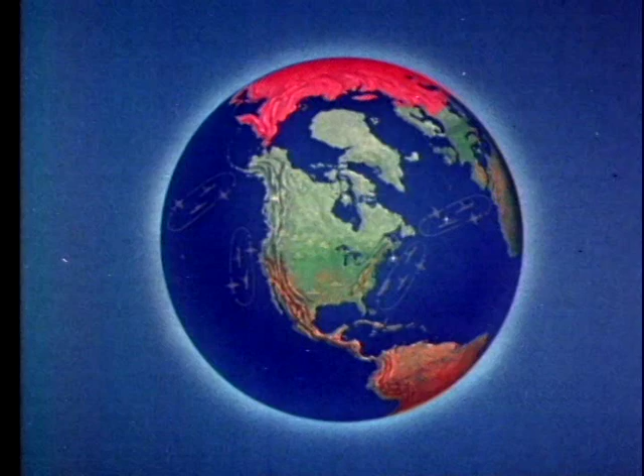Sprawled across North America, from the polar ice cap to the Mexican border, is a giant with 1,000 eyes. Day and night, fair weather or foul, he guards his homeland. This giant is the air defense system of North America, a vast and intricate maze of radar networks. Through the electronic eyes of this giant, we are able to see the enemy before the enemy sees us.

These radars never sleep. Round the clock, they stand ready to do their part in minimizing the penetration of enemy bombers. And round the clock, their quietly pulsing hearts, the magnetrons and the klystrons, help generate the power for peace that keeps America strong.

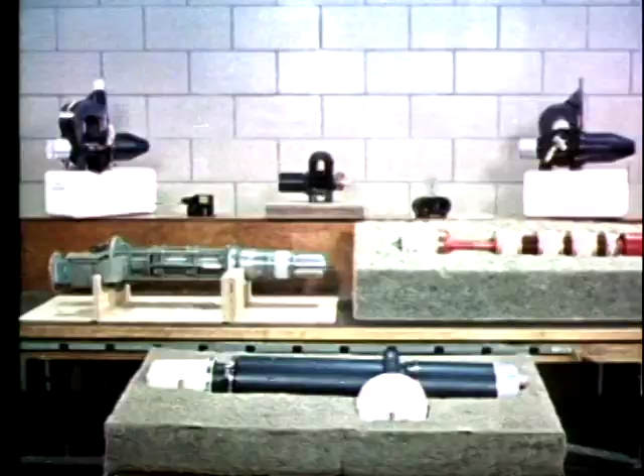These microwave power tubes, the magnetron to generate the radar signal, the klystron amplifier for radio communication, and radar are the subject of our story. It is a story about these vital tubes, but even more about you, the men who work with them. When you have a well-trained maintenance man with a well-adjusted radar at a well-chosen site, then you've really got a winning team.

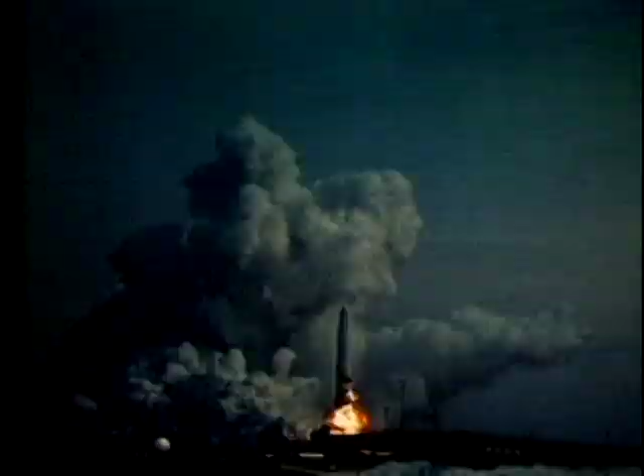They keep the airborne radars operating and ready for crucial missions. In missiles that depend upon radar for guidance. In bombers that depend upon radar for bombing and navigation. In interceptors that depend upon radar for fire control. And in reconnaissance and search aircraft that depend upon radar to extend their vision.

Years of scientific research and millions of dollars worth of equipment have gone into this aircraft. But only if the maintenance men keep the radar functioning can it complete its mission. When something goes wrong, they've got to make a quick decision, whether to attempt repairs in flight or abort the mission.

There's trouble here, that's for sure. But what kind of trouble? First, they check the radar scope presentation. Sometimes this gives a clue. But the most reliable analysis comes from the test equipment on the monitor panel.

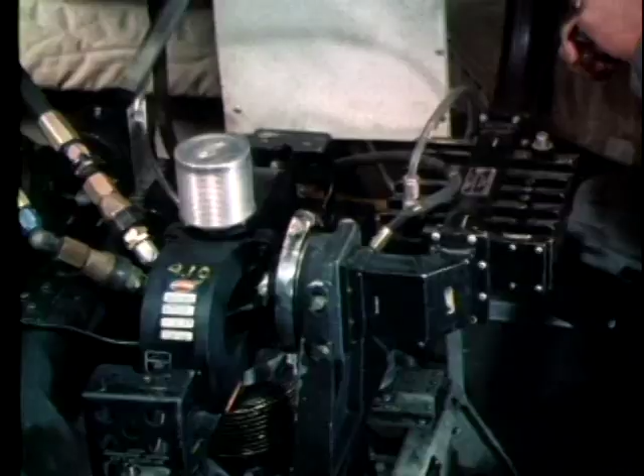Yes, the pressure's low. This is a danger signal. If this arcing continues, the magnetron output window may be damaged, the tube's vacuum lost, and the magnetron destroyed. Waveguide joints should be tested to make sure they're airtight.

This man is making a liquid soap test. See where the bubbles are forming? He's found the trouble. But how serious is it?

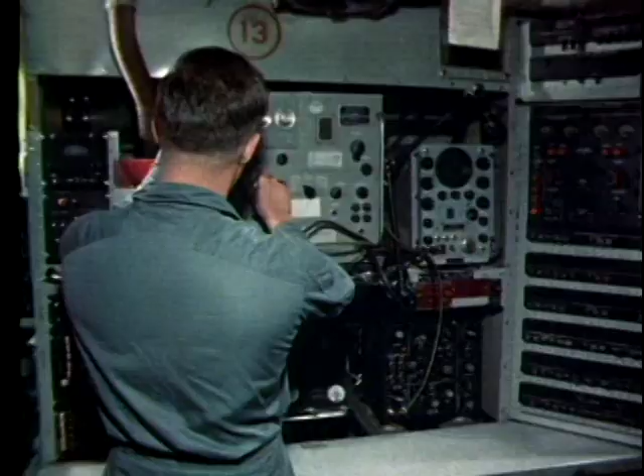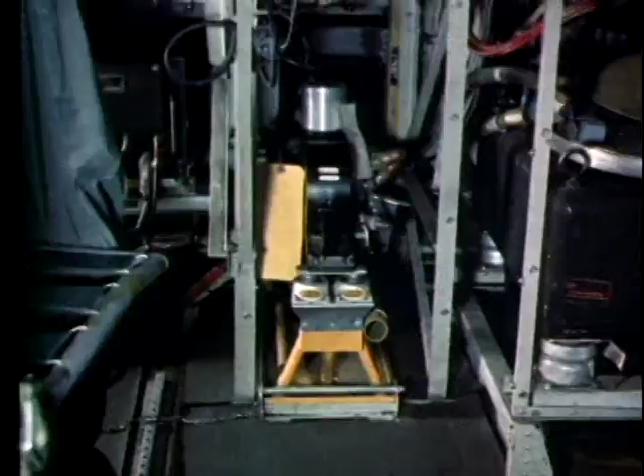He checks the spectrum analyzer again. It looks bad. See how the pulse has changed? Finally, the main pulse deteriorates completely. Bad news. The magnetron is seriously damaged. It's beyond repair. This means shut down the equipment and get ready to install the spare.

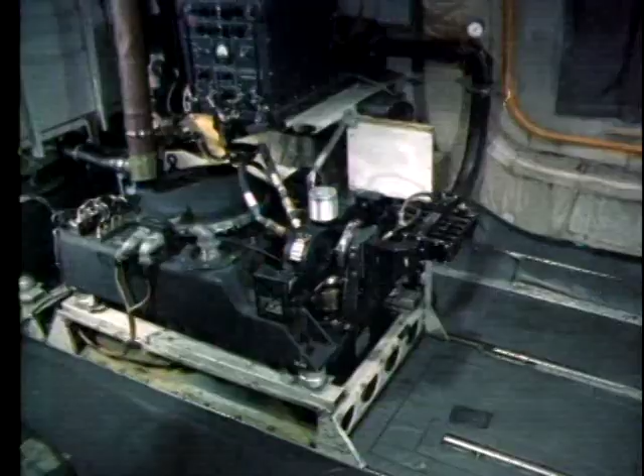While they're working, let's take a look inside the magnetron. Animation shows what caused the malfunction. We'll turn time back a few hours and show the Maggie functioning normally.

As the pulse from the modulator is applied, the Maggie produces radio frequency oscillations to form the radar pulse. This energy is then coupled into the waveguide and directed to the antenna for transmission.

Energy is reflected back along the waveguide toward the magnetron. Normally, when the antenna system is in good shape, the reflected wave won't be strong enough to cause arcing at critical points.

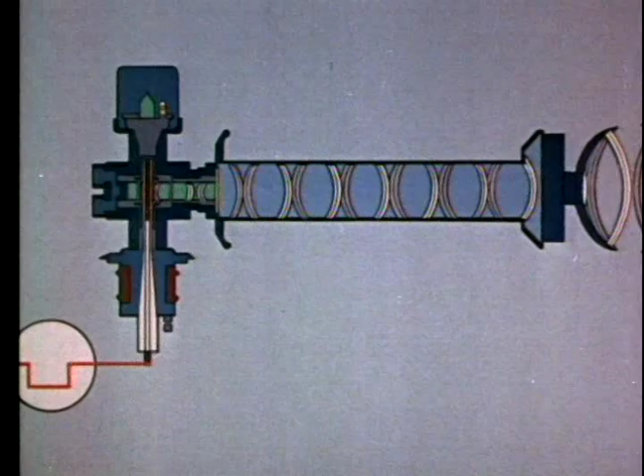But as conditions such as loss of waveguide pressure develop, the antenna characteristics change and the reflected wave becomes greater. Then arcing may take place at the point where the radar wave leaves the magnetron, causing the magnetron output window to crack or puncture.

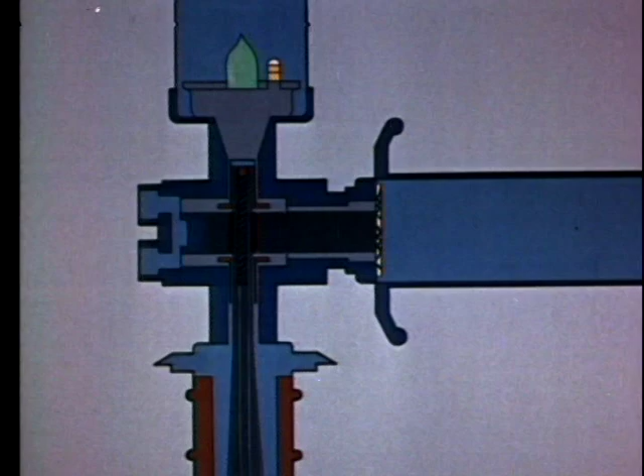As the vacuum is lost, the heater oxidizes and burns out. The cathode cools. Air seeps into the interaction space, and arcing occurs with each pulse.

After the magnetron has been unbolted, the filament and cathode connections are uncoupled. A large magnetron like this one requires 2 men to handle it safely.

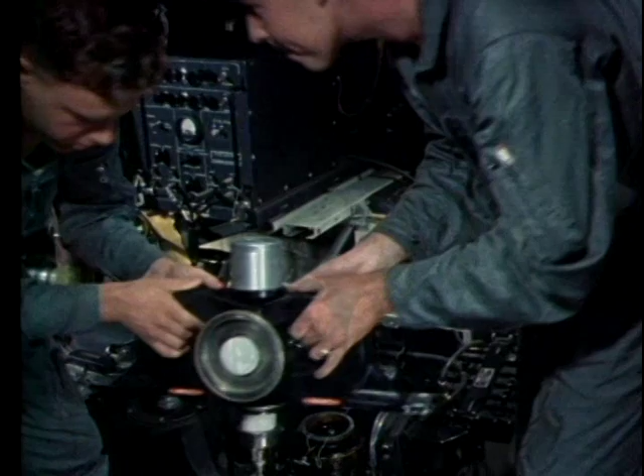Before a Maggie is replaced, all connections, mating flanges, and sealing surfaces should be inspected. Insulating oil should be examined for foreign matter. Damaged or worn gaskets should be replaced.

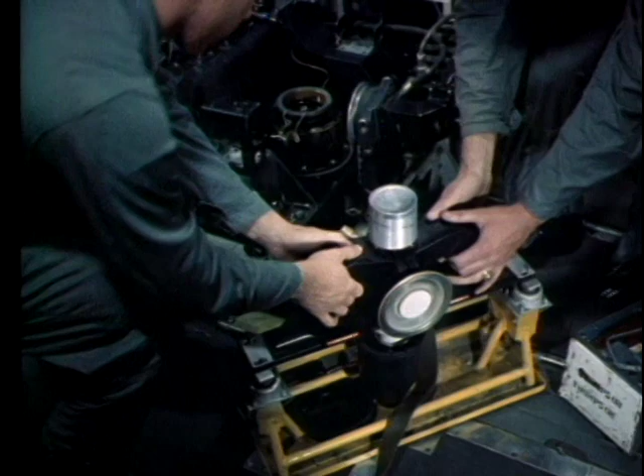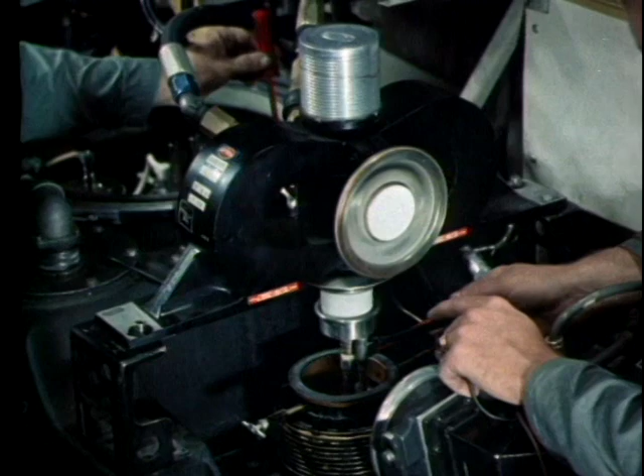Heater's supply voltage should be established at the value marked on the tube. Later, when the plane returns to base, the heater voltage should be double-checked with an accurate instrument.

Now that the spare magnetron has been installed, further tests are necessary. The technician must make sure he has the required pressure and that there are no air leaks. Instructions concerning the care of pressurized antenna systems will be found in the appropriate tech order handbook.

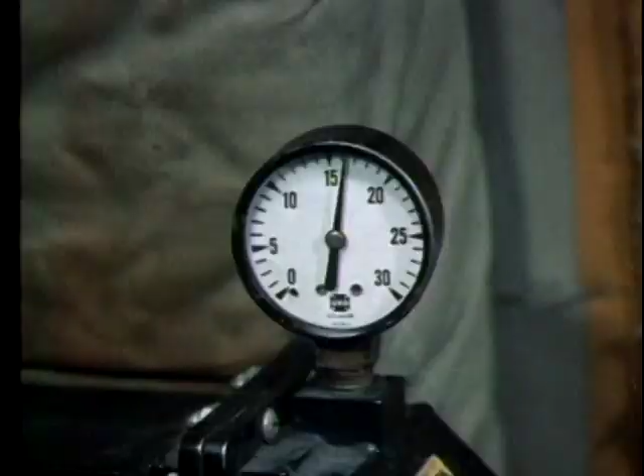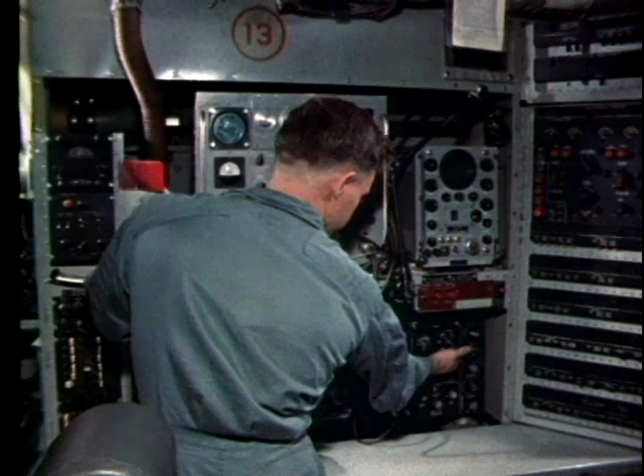The liquid soap method is a simple way to check for pressure leaks and may be used where more accurate means of testing are not available. Test equipment is used to analyze the performance of a newly installed tube.

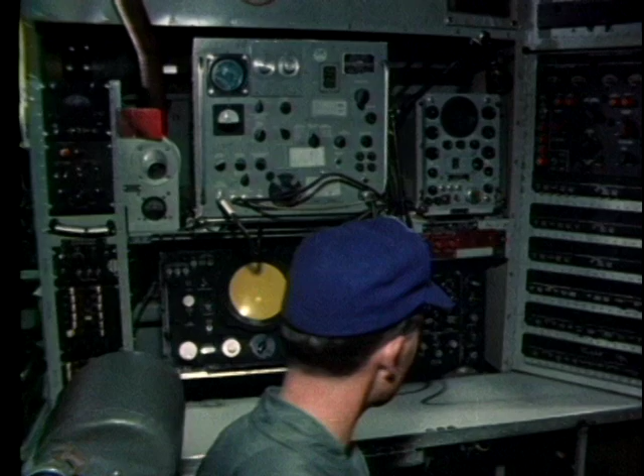Not only that, it means that these technicians know their jobs. They were able to analyze the trouble correctly and replace the magnetron in flight. Because they knew what to do, this aircraft was able to complete its mission.

Let's take a closer look at these microwave power tubes. Magnetrons costing from $100 to $10,000.

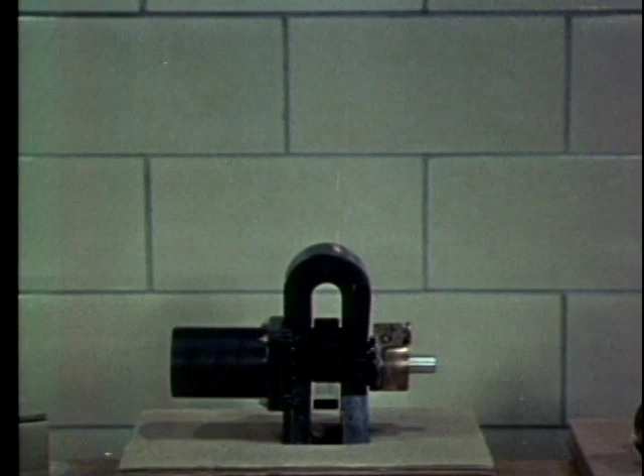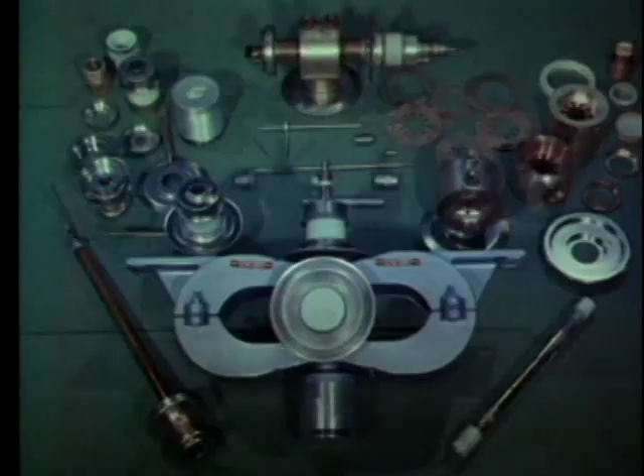Klystrons costing from $1,500 to $25,000. Why so expensive? Let's see what's inside them. Look at this—parts so critical they must be inspected through a microscope.

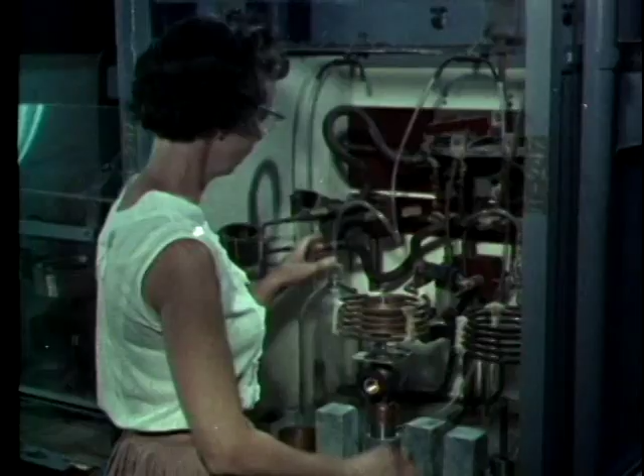Tolerances accurate to 4/1000ths of an inch. To build them to such close tolerances requires involved manufacturing processes. Specialized parts must be carefully assembled.

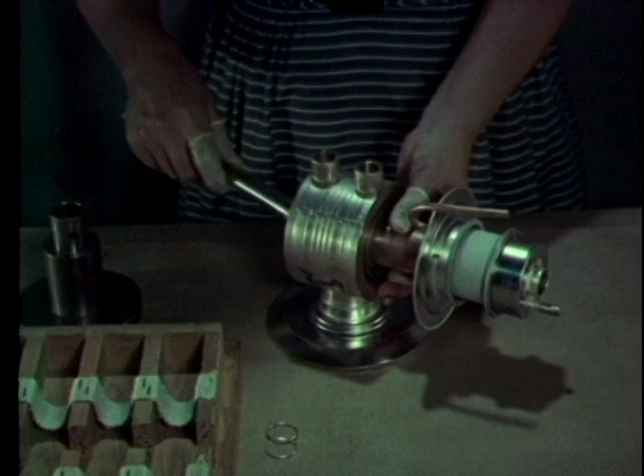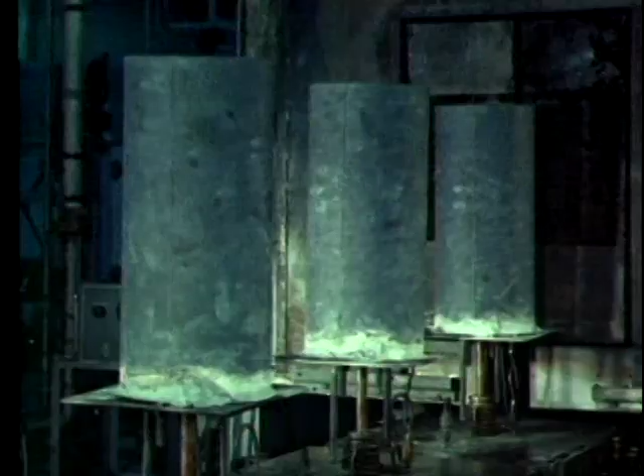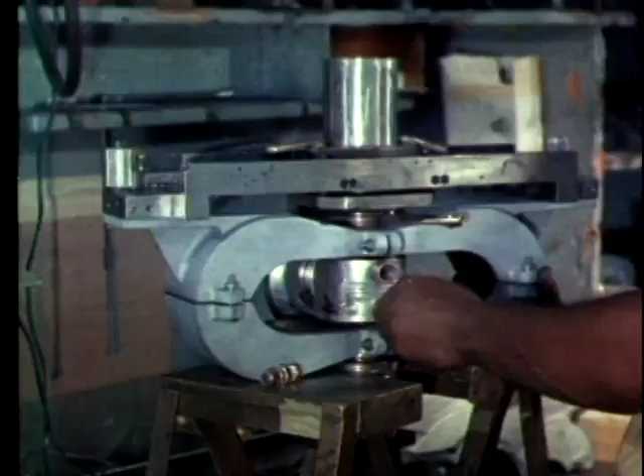The completed assembly is heat treated to bake out gas molecules, so that they may be removed by an evacuation machine. External mechanical parts, such as couplings and magnets, are installed. The final step is rigid testing of electrical performance to make sure it meets the high standards required.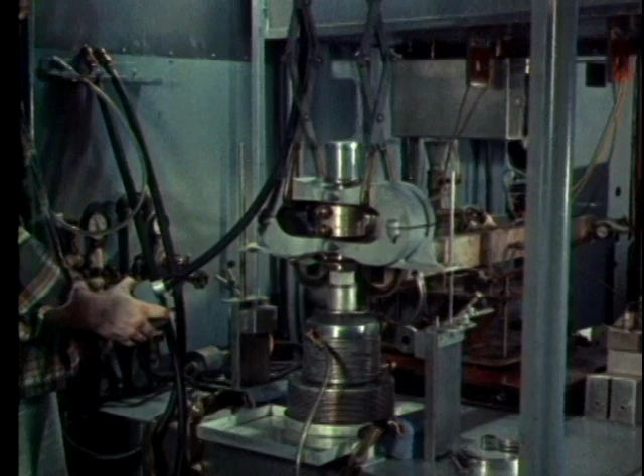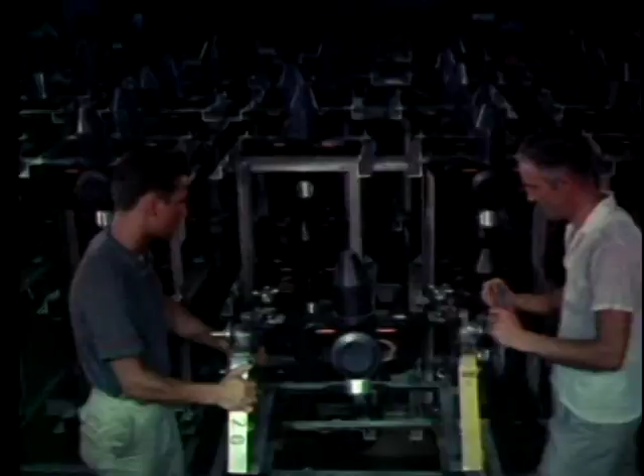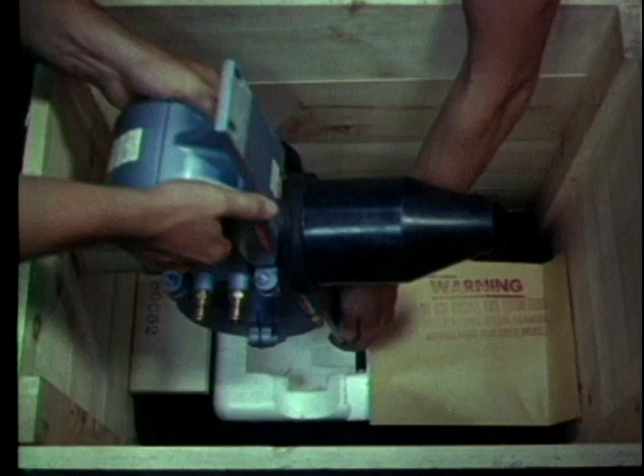Pressure tests ensure leak-proof connections throughout. Now the tubes can be put into storage. Even here, should tiny defects develop while on the shelf, continuous sample testing will reveal them. Before shipment, the delicate tubes are carefully packaged.

The quality designed in during research, built in during manufacture, maintained by rigid testing and careful storage, will reach the user intact.

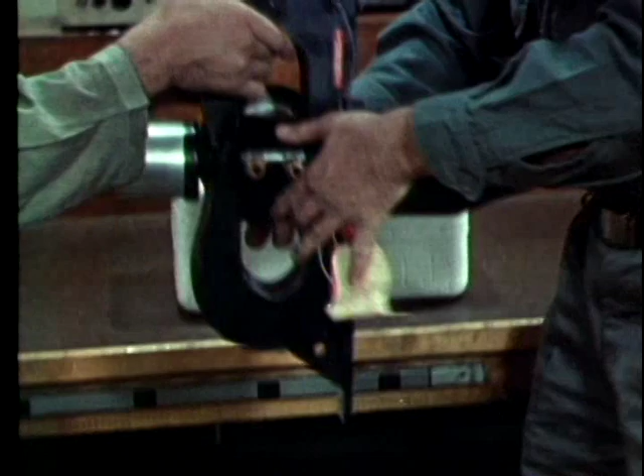Here are a few basic rules on proper handling. Always use two men to lift a heavy tube. A portion of a carton makes a good tube stand, protecting delicate parts from damage. But a wooden rack is better and lasts longer.

Save all the cartons and packaging materials. Use them to return defective tubes to the factory.

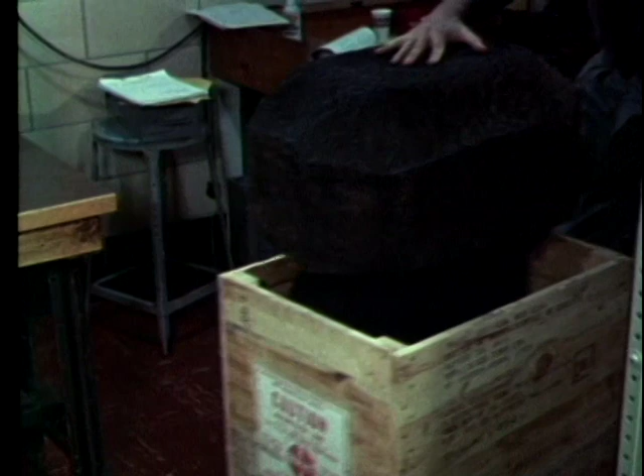Magnetrons should be separated at least 12 inches, then their magnetic fields won't interact. Don't store them on steel shelves, or they may be degaussed. Don't use steel tools.

Use non-magnetic tools. Following these simple rules will save time and trouble, prevent damage, and save the Air Force many thousands of dollars each year.

On most of the smaller high-performance aircraft like this one, it is not possible to do in-flight radar maintenance. Therefore, most of the work must be done in the electronics maintenance shop.

This aircraft has just aborted an intercept training mission. The reason: radar malfunction. Had this mission been the real thing, an enemy bomber could have broken through our defenses. The maintenance man's job is to find out why the radar malfunctioned and correct the trouble.

You'll see that although these radars come in smaller packages than those on larger aircraft, they are just as big a maintenance problem. The maintenance supervisor is in charge of this work.

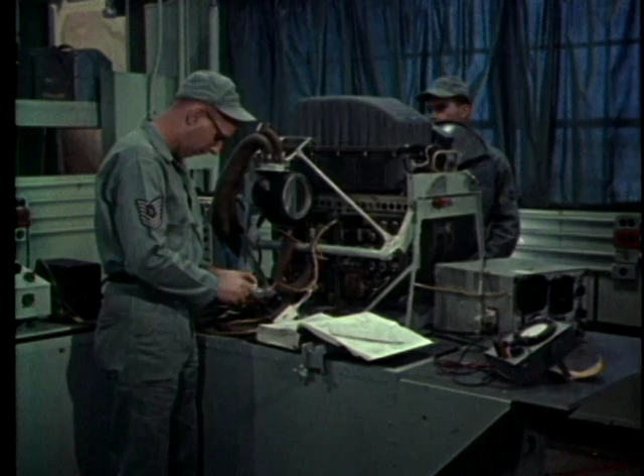An important point to remember is that the transmitter malfunction may be caused by parts other than the magnetron. Wherever possible, other circuit components should be checked before power is applied.

A simple resistance check will often reveal a short circuit. That's what the trouble is here. The airman will carry on from here and trace the short circuit.

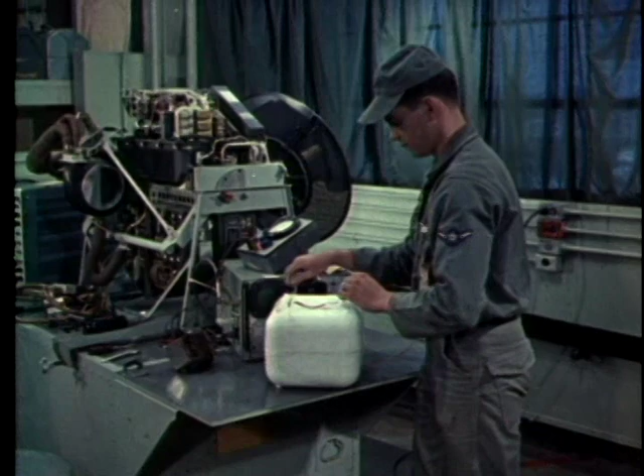So far, so good. He's found a shorted filament transformer and replaced it with a new one. But what's this? He's decided to change the magnetron, too.

The supervisor disagrees. Tube swapping is not a good idea. The old magnetron should be thoroughly tested before any decision is made.

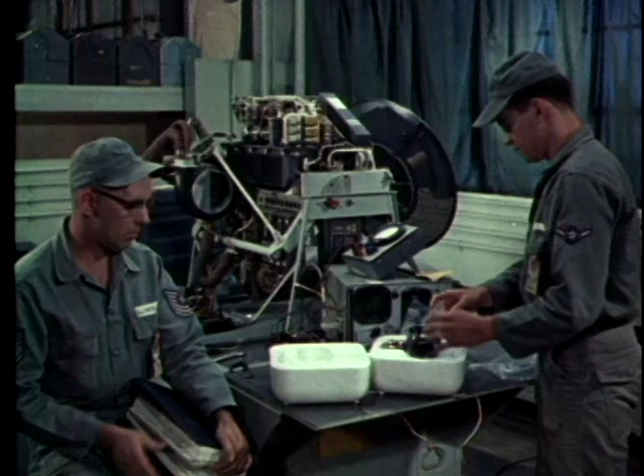Testing showed that the old magnetron should be replaced. This has been done. Now let's see how the new Maggie behaves.

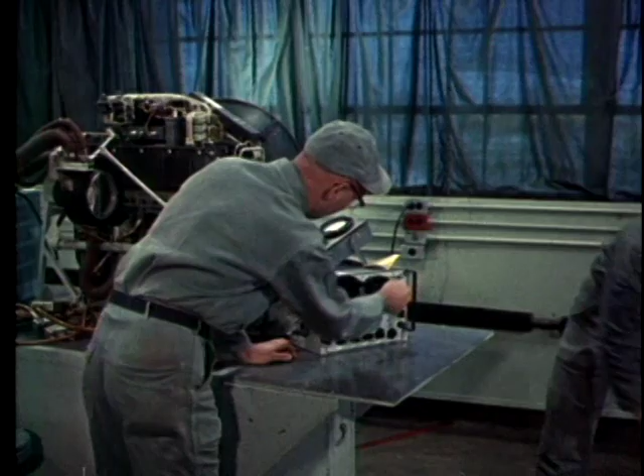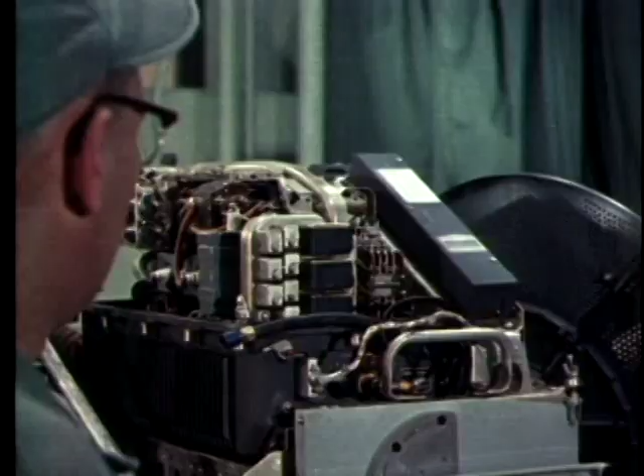This is confusing. The spectrum analyzer shows arcing. Let's look inside the tube and see what's causing it.

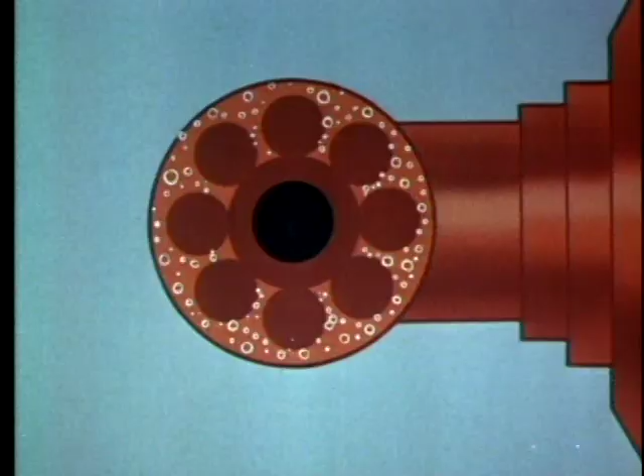Magnetrons are made of porous metals, which usually trap a small amount of residual gas. During storage, gas molecules migrate into the interaction space surrounding the cathode. When the tube is installed and power applied, it will operate normally if the gas content is low.

But if gas content is high, arcing will occur with each modulator pulse. This arcing might be mild or severe. Frequently, tubes with residual gas can be restored to normal operation by a suitable break-in or seasoning period.

During break-in, the gas molecules are driven back into the walls of the tube, and normal operation resumes. If the equipment is operated frequently, normal operation should continue throughout the life of the tube.

Occasional individual arcs may also be noted in a normal tube which does not contain gas, but this behavior is due to transient conditions and should be considered as normal.

All new tubes which display arcing when they are first installed should be thoroughly tested and analyzed before being discarded. This will save the government both time and money.

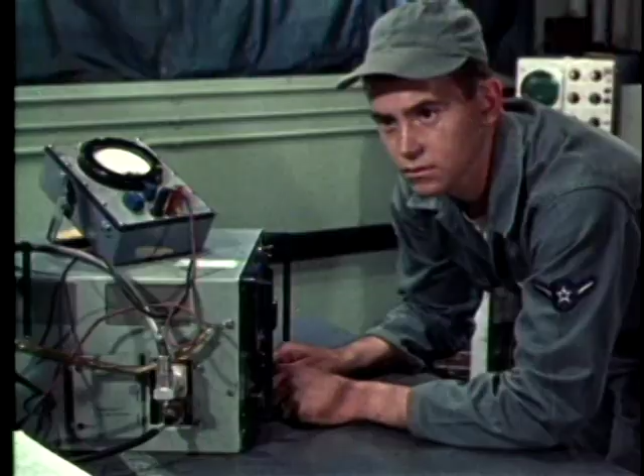The repairs are finished. Now comes the break-in procedure. Proper break-in can clear up various degrees of internal arcing. But watch the spectrum analyzer carefully. If frequent arcs occur, switch to standby immediately.

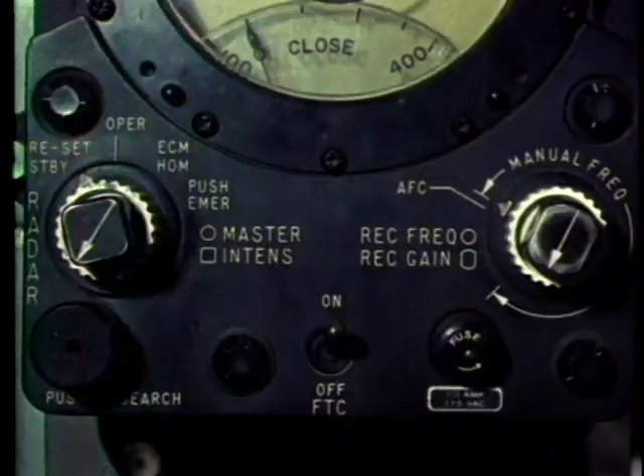Small magnetrons may be damaged if severe arcing is allowed to continue more than 2 seconds. Now the range selector switch must be changed to short pulse before the magnetron is operated.

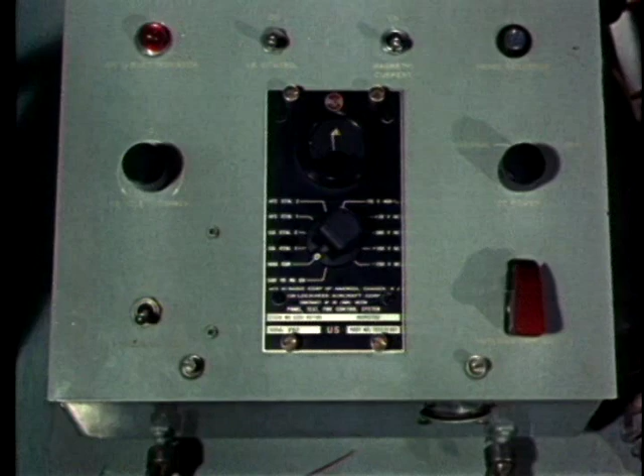If only sporadic arcing occurs, operation may be continued. But a series of arcs may cause the overload to pop. In this case, reset the switch and continue the break-in.

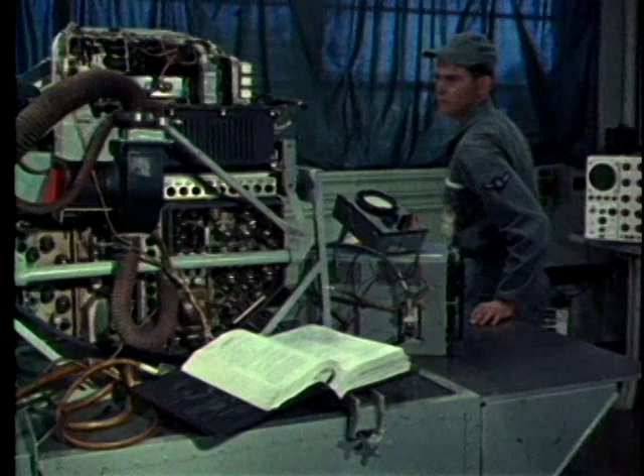To avoid possible damage during the break-in, the technician should keep a close watch on modulator tubes and other components of the RT unit. The time required for break-in will vary with the tube, conditions, and methods used, but normally break-in can be accomplished in 20 to 60 minutes. When break-in is complete, and only infrequent arcs or misfirings occur, operation may be regarded as normal, and the equipment made ready for service.

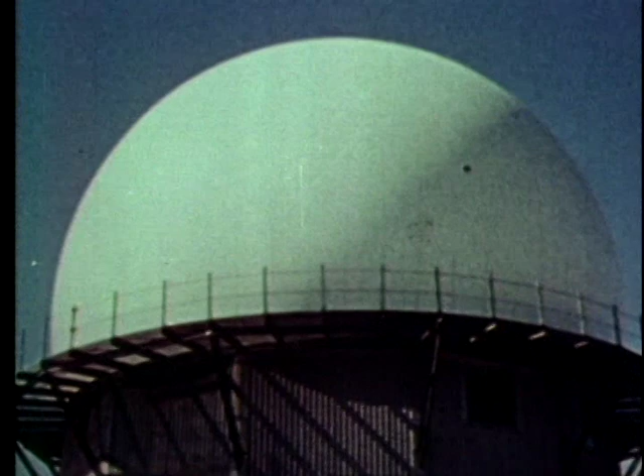In addition to the airborne radars, there are a great many ground radar sites scattered about the continental United States and Canada. They are found in almost every type of American scene: in the dusty expanse of the plains, in the north woods, the heat and humidity of the deep south, in the rolling farmlands of the Midwest, and the saltwater scenes of our coastal areas.

Each of these has its own problems of maintaining and efficiently operating its microwave power tubes on a round-the-clock basis. Some of this equipment is completely automatic, but experienced technicians are always nearby, just in case. At the many radar sites where there is no standby equipment, the maintenance man is an even more vital unit in the organization.

In the operations room, observers keep constant watch on the radar scopes. Here's trouble developing.

When equipment starts to malfunction, quick repair is a must. These men are so used to the sound of the equipment, they can tell by listening whether the magnetron is operating or not. It's not.

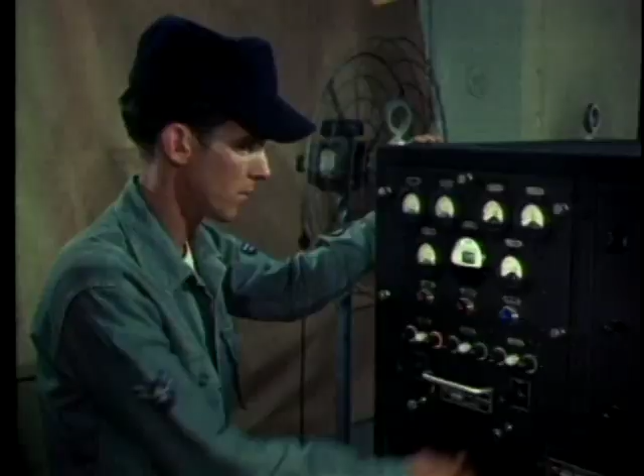Something caused this radar to quit. What was it? Sometimes the meters will tell the story. The filament current has dropped to 0, and the filament voltage is too high, indicating that a portion of the heater element is open. A quick, careful analysis has to be made.

Here is where maintenance skill and training pay off. The question is, has the magnetron become inoperative because of heater failure? Or is there another cause?

Yes, here's something. The insulator is pitted. High-powered magnetrons like this one have insulator bushings immersed in oil. It might be that the insulating oil has broken down. Better check this.

Here's the answer. Contaminated oil. The oil failed to insulate. Oil can break down after long exposure to heat and high voltage. Oil may also be contaminated by dust, moisture, metal particles, or air bubbles.

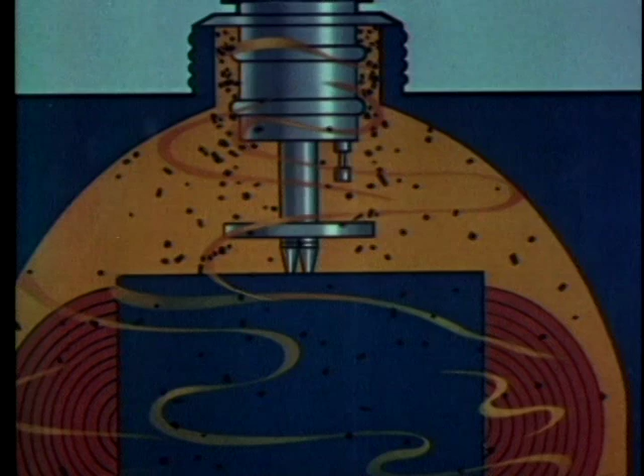Here is how contamination breaks down oil. As contamination accumulates in the oil, current paths are created between high voltage terminals and ground. As the condition becomes worse, due to increase of contamination and change in oil structure, a definite high voltage path for corona discharge is created in the oil.

The corona discharge begins to erode the surfaces of the insulator. As the insulators are penetrated, the vacuum in the tube is destroyed, and the tube is damaged beyond recovery.

The maintenance men have completed oil replacement using all precautions to prevent contamination. They have checked the grade of oil against tech orders and factory instructions.

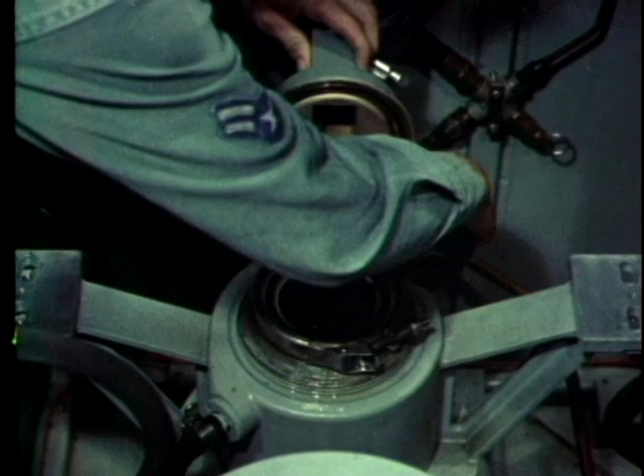But before installing the new Maggie, all mating surfaces and flanges must be inspected and cleaned or replaced as required. It is also necessary to check waveguide parts, replace gaskets, coolant hoses, oil fittings, and so forth.

Be sure all electrical connections are secure. Careful, watch out that terminal doesn't hit the cabinet. That could ruin the tube.

Make certain that all clamps, bolts, coolant hoses, and so forth are secure before operating the tube. All set? Okay, hit the power button. Uh-oh, that one didn't last long.

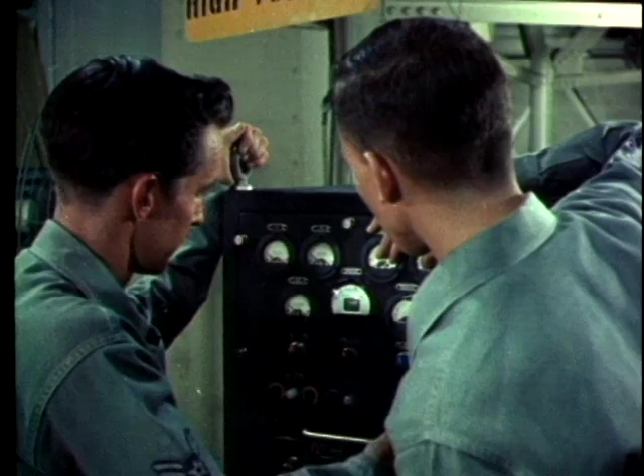There are many reasons why new tubes may fail to function properly. One of the primary causes of tube failure is damage sustained during transportation and handling. This damage may occur during shipping or in the depot, or during Air Force distribution to the base.

Here is what actually happened to that new tube which failed to operate. Nobody saw it happen. Nobody's going to tell. And nobody's going to get the slightest use out of that magnetron.

But these men don't know this Maggie fell off a truck. They just know it won't work. Could it be something wrong with the rest of the equipment? A short circuit? A bad connection? Or should they pull out this Maggie and install another?

They've installed another new Maggie. They've also followed correct procedure, allowing the heater to warm up 5 minutes before applying power to the anode. Ah, it works.

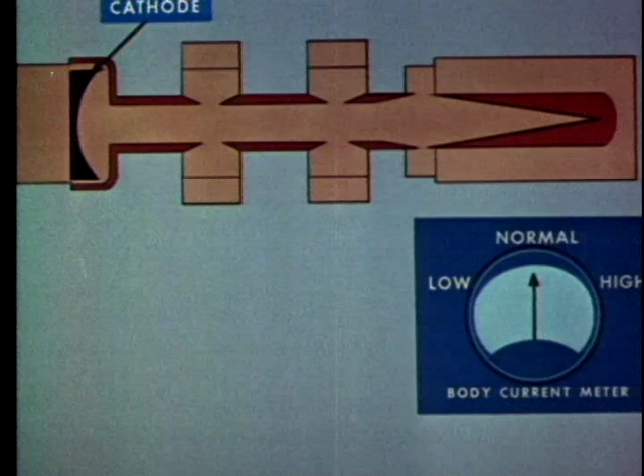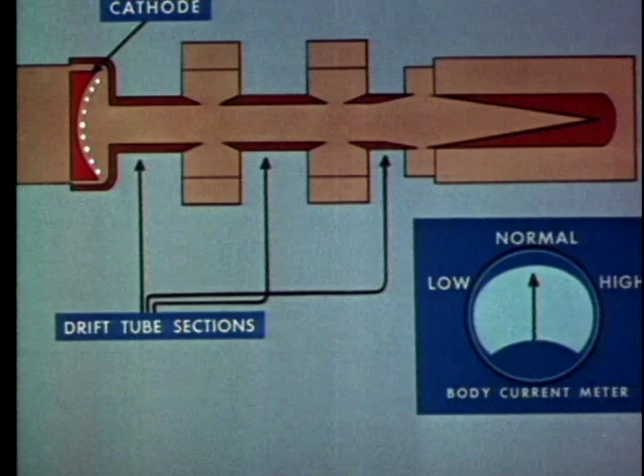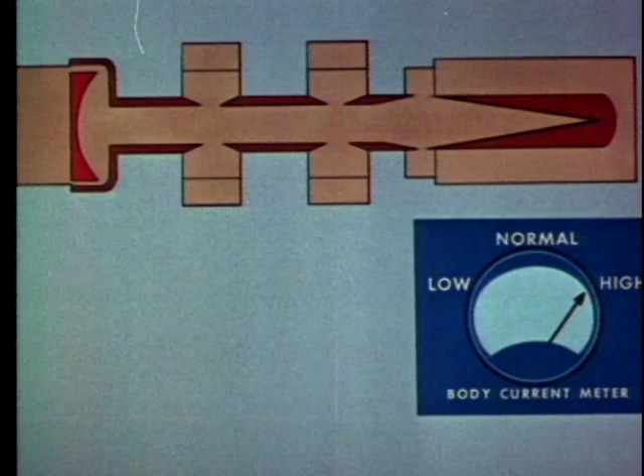Let's look inside a typical two-cavity power Klystron and see how it operates. The beam current is emitted by a heated cathode and passes through the drift tube sections. Since electrons in the beam have like charges, they repel each other and tend to diverge, to be absorbed by the walls of the drift tube sections. But electromagnetic coils placed along the tube align them into straight paths. However, misalignment of the focus coils can seriously damage the drift tube tips. Therefore, it is most important to adjust the magnetic coil currents properly during installation of the tube.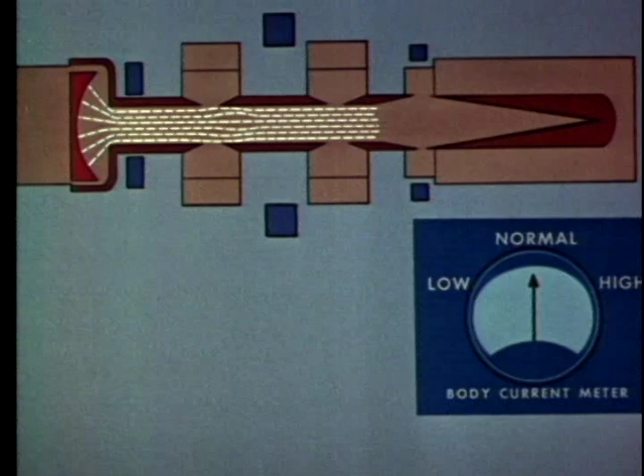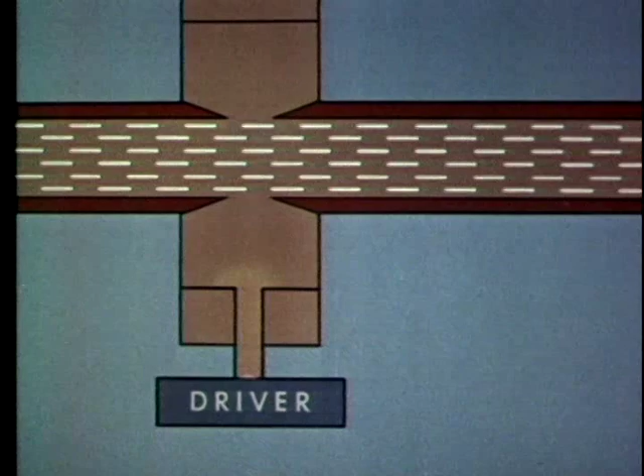When a steady direct current is flowing through the tube, an RF signal from the RF driver stage is introduced into the first cavity resonator. As the cavity is tuned to resonance, a strong RF field appears between the drift tube tips, which form a gap in the resonator. The electrical charges on these tips alternate at the driver frequency rate on opposite sides of the gap. At the same time, individual electrons in the beam are being accelerated or decelerated at the RF frequency rate.

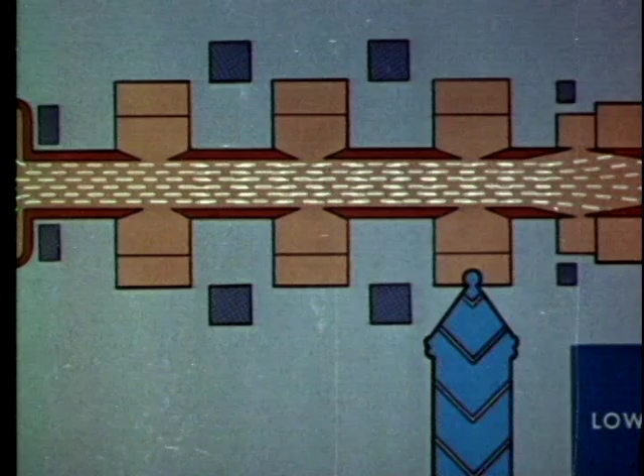This produces bunching of the electrons as they approach the gap in the second resonator. There they are decelerated and release energy. The resonator converts this energy to RF energy and amplifies it. Additional resonators are sometimes provided for greater amplification. From the last resonator, the amplified RF signal is coupled into the waveguide and transmitted to the antenna.

Various kinds of Klystrons are being phased into new Air Force applications, such as these tropospheric scatter communications transmitters. In this way, intelligence may be relayed from remote early warning sites to control centers many hundreds of miles away.

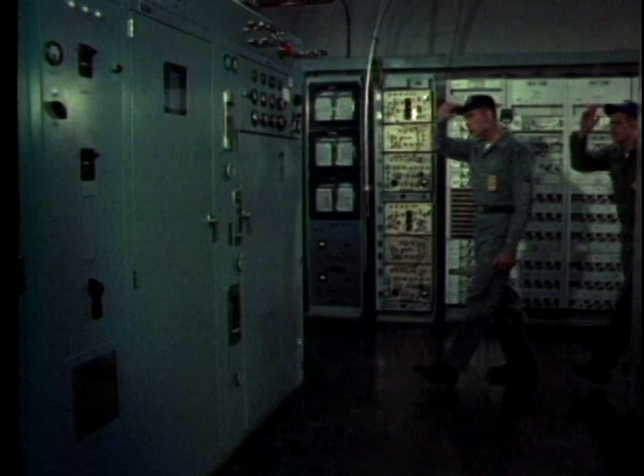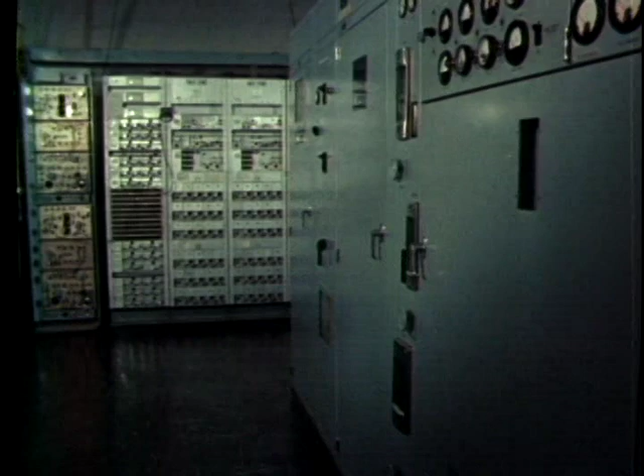This transmitter has dual equipment. One transmitter operates while the other is on standby in case of emergency. The equipment is automatic. Meters and instruments keep a constant check on its operation, and a warning light flashes in case of trouble.

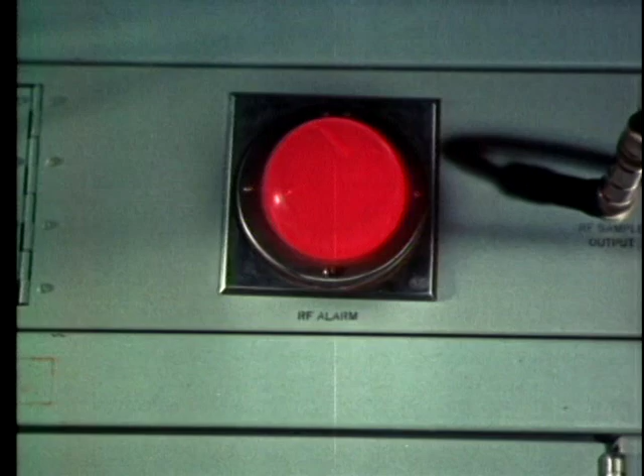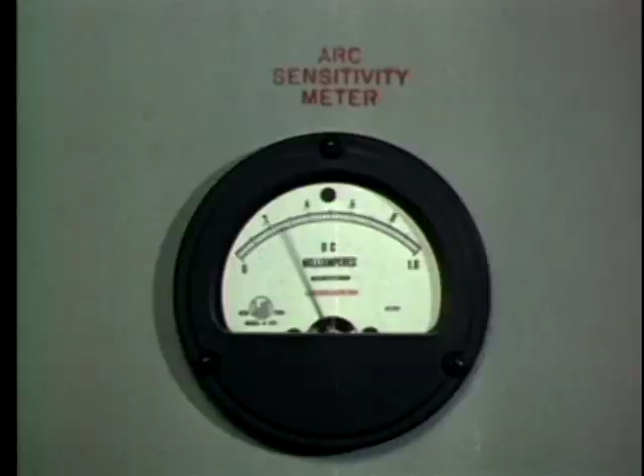And speaking of trouble, a glance at the meters tells them the trouble is in the transmitter output. The equipment is reoperated. Readjustment of the output cavity and coupler may correct the trouble, but the arcing continues. Since adjustment won't correct the trouble, all they can do is shut down the transmitter for repair and switch over to standby.

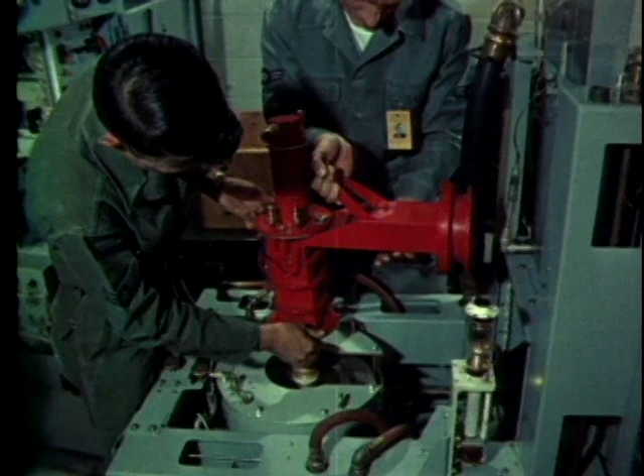The Klystron has been removed for inspection. It may have been damaged by the arcing. Yes, the output ceramic is badly damaged.

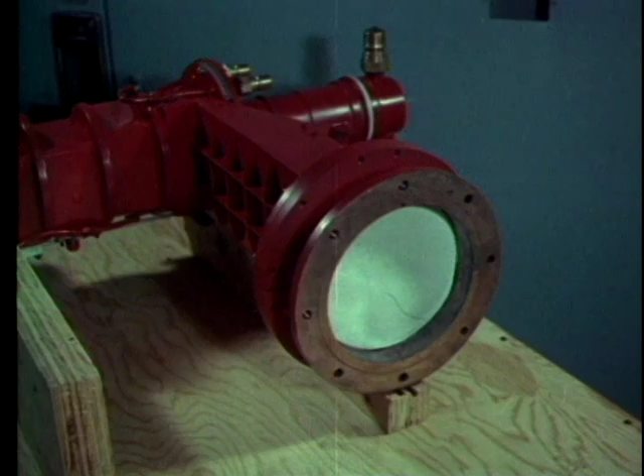An important consideration in maintaining the Klystron is the proper adjustment of the impedance matching unit. In this case, improper adjustment of this unit during installation ultimately caused the arcing in the output section, which in turn destroyed the tube.

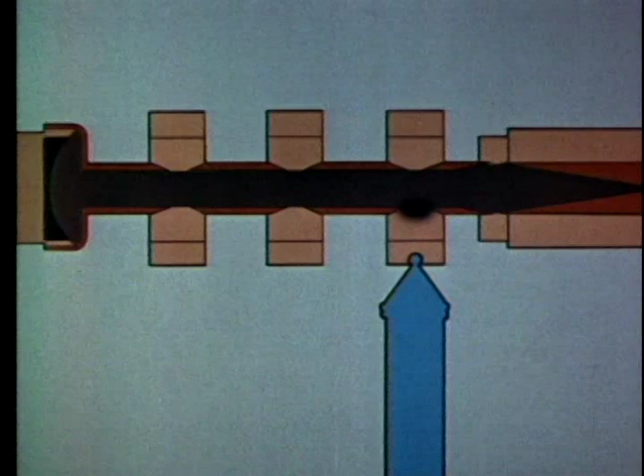There are two types of meters which help maintain proper coupling: the power output meter and the VSWR, or voltage standing wave ratio meter. These measuring devices should periodically be checked for accuracy. But in general, the best way to avoid damaging or destroying the Klystron is to study and thoroughly understand the various installation and operating instructions furnished by the equipment and tube manufacturers.

Only by doing this can the Air Force technicians and maintenance men hope to get the full operating life from their Klystrons.

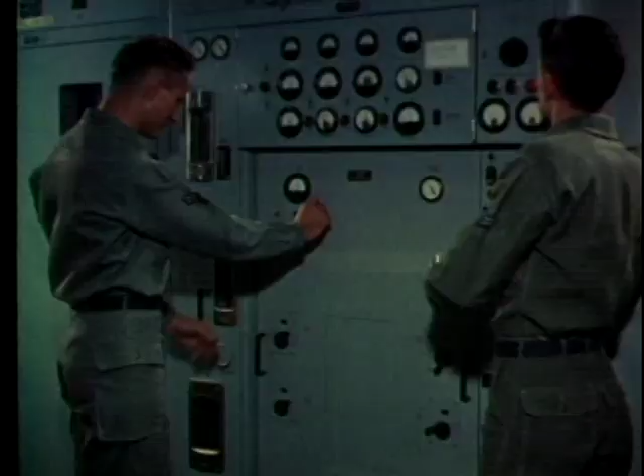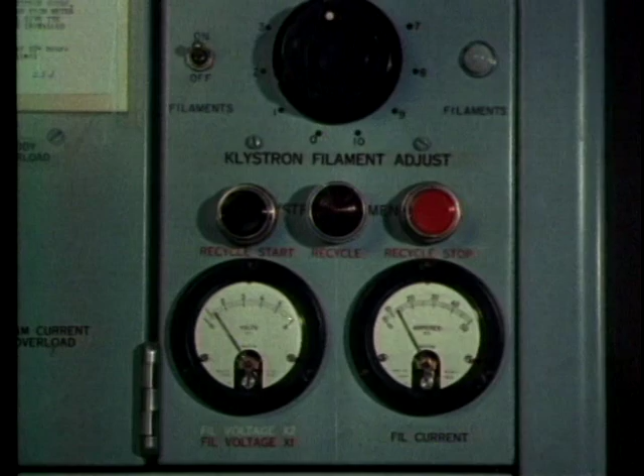At the Tropo Shack, the maintenance men have installed the new Klystron. But before operating at full power, they are careful to recheck all circuit meter readings and coolant flow gauges. These meters are important because a minor error in one of the adjustments might shorten the life of the tube.

The power Klystron is really a very dependable piece of equipment if properly treated. Once it has been correctly installed and aligned, it requires very little maintenance during its long service life. A good rule to follow is: install it carefully, align it properly, then leave it alone.

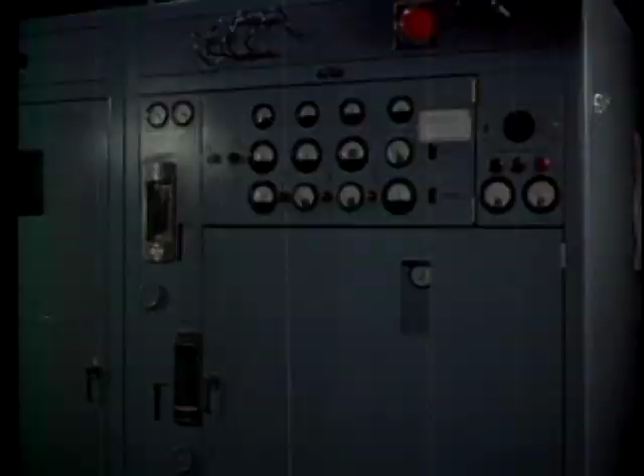As the progress of aircraft and air defense continues, other and more varied uses will undoubtedly be found for microwave power tubes. With these new applications will come new problems to be solved by maintenance men of the future. Those men will tread the paths charted by technicians of today who found that this type of maintenance can be simplified by careful attention to four basic factors: careful handling,

proper break-in, avoidance of tube swapping and trial and error maintenance, and the timely use of maintenance aids such as test equipment, tech order handbooks, and manufacturer's information pamphlets. There is no substitute for know-how, initiative, and ingenuity.

Yet no one man or group of men can do this job alone. Maintenance is a team effort. Only by the cooperation of procurement, supply, transportation, and every department concerned can the Air Force continue to operate the reliable radar equipment which is such a vital part of national defense.

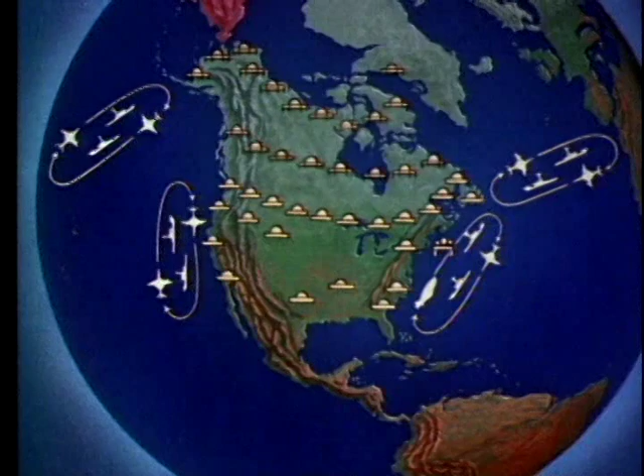Only by continued teamwork and devotion to duty can the radar eyes of America guide us to that peaceful tomorrow, which is the reward of nations who stay alert today and every day.